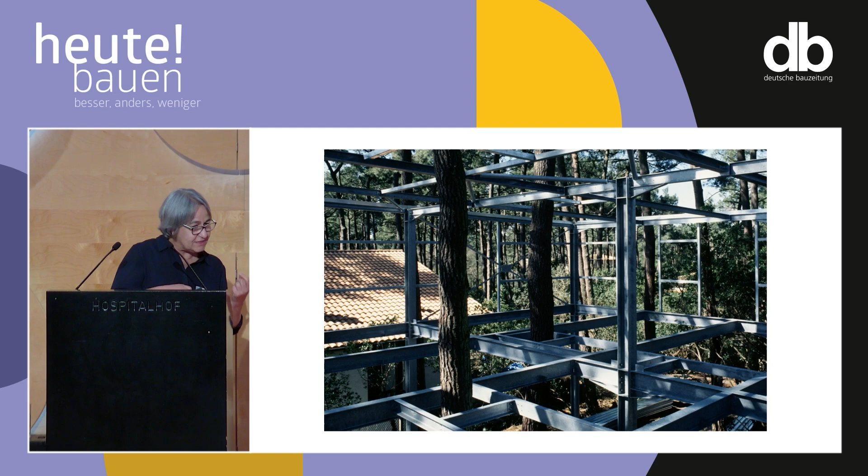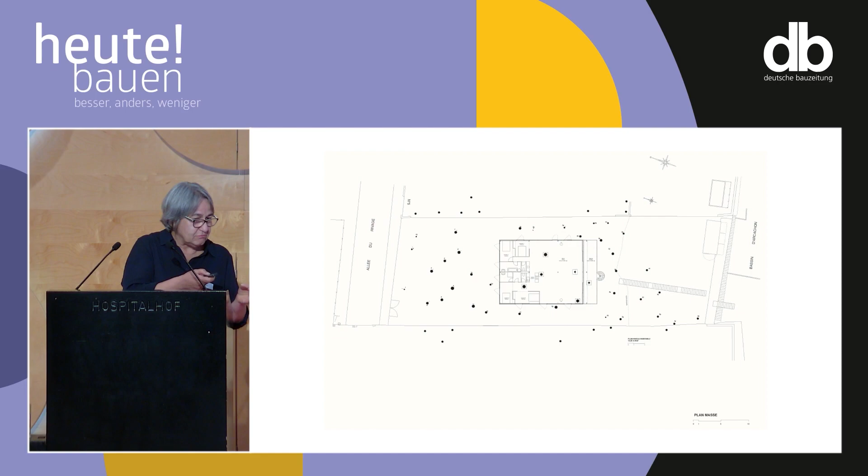So the house is elevated at 3 to 4 meters high, and it's a simple construction that is not made in function of the trees, but tries to integrate into the trees. And what is also interesting is that the land is so expensive in this place that the cost of the house is something like 20% of the cost of the land. So it really gives finally the good place to the architecture. Architecture is not so important at this place.

So the trees are inside, in the middle of the corridor where they were. And the inside, it's a mix of landscape and architecture, but where the landscape still dominates. Making with value of the place, that was also the question in this little square in the city of Bordeaux. It's a project that we did in '96.

We were involved by the city, as a few other architects, to work on a number of squares in the city. The city had a project which was called embellishment of the squares of the city. And they did the first place as an example, with new pavement, new design of benches, new furniture, new lamps. And they gave this as an example that all the squares could be embellished in that way. So the square was not really in the city center. It was a very quiet neighborhood behind the train station.

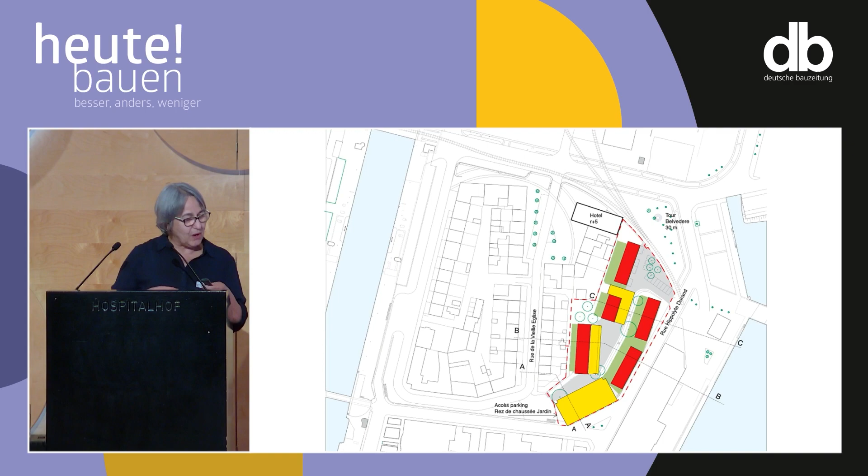And we understand why people were so happy to live there, and we didn't see which reason could allow us to say, no, you should go, because we have to replace all of this. And we propose this kind of project where, in red, it's the existing. The lowest red buildings we transform into houses to improve the typology, to make larger apartments. The yellow in front of the red is an extension of the existing to transform the housing, but also to go higher, to add new housing. And the yellow is a new building in place of the parking lot.

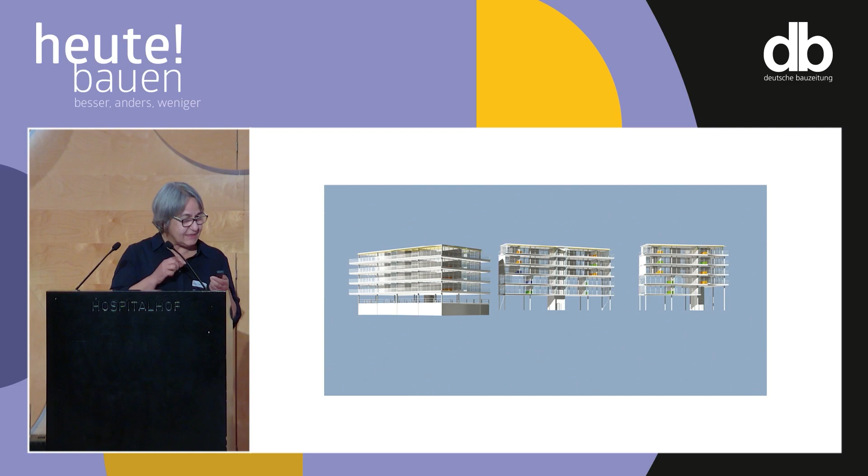So the addition was to create these new buildings, but they were not alone, they were integrated in or added to new constructions. And that was the opportunity also, and we proposed already at the time to do this extension without removing any family. So the extension could be made, and then it's a new space in front, but keeping the qualities of what is already there. Extension. So that was the proposal.

They were really interested by the proposal, but because the brief said that the demolition should be made, they couldn't accept this project, so they decided to cancel the competition and to make a second one. We couldn't participate in the second, and now this Little Morocco does not exist anymore. But that was an interesting experience, and that was also finally the opportunity to start a discussion with the owner. And 5 or 6 years later, we were involved in a project of transformation of a small tower, but it cannot be so satisfying because what is lost, you cannot find again.

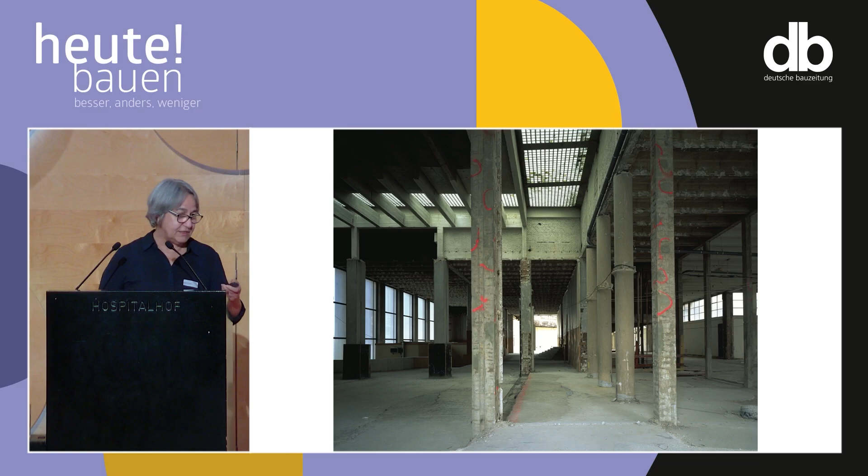So suddenly, the government decided to stop this project of transformation. And this was a museum, and this became, after 1 year of construction works, this kind of ruin left a few years with nothing inside, really in the center of Paris, facing the Eiffel Tower, with water falling inside, with no more elevators, a lot of things broken, a great fragility of the structures because the walls had been broken.

And probably somebody said, oh, it's a pity to let this place close with nothing. And they decided to put there a very little project, which was a temporary project of Center for Young Creation, with a budget of 3 million. 3 million, and the building is 26,000 square meters. So they launched a competition. So we applied, we were selected for this first phase, and in fact it was a special competition because they didn't ask to make a project.

We made a visit, and they said to the 3 teams, you should come back in 1 week and say what you propose to do for this temporary installation. And the fact that it was so little money and a temporary installation meant that finally the Ministry of Culture didn't take so much interest in it. So after 1 week, we came again, and we just gave a text, and we said, in fact, here the architecture is already there and is already fantastic, but the building has some damages.

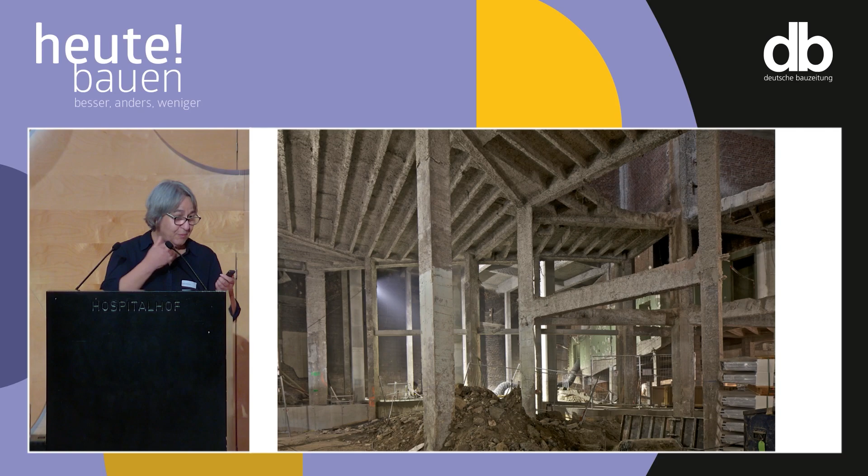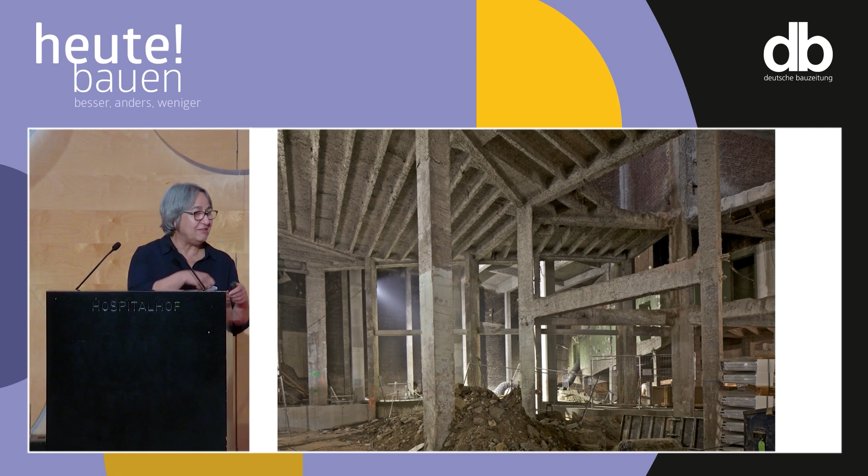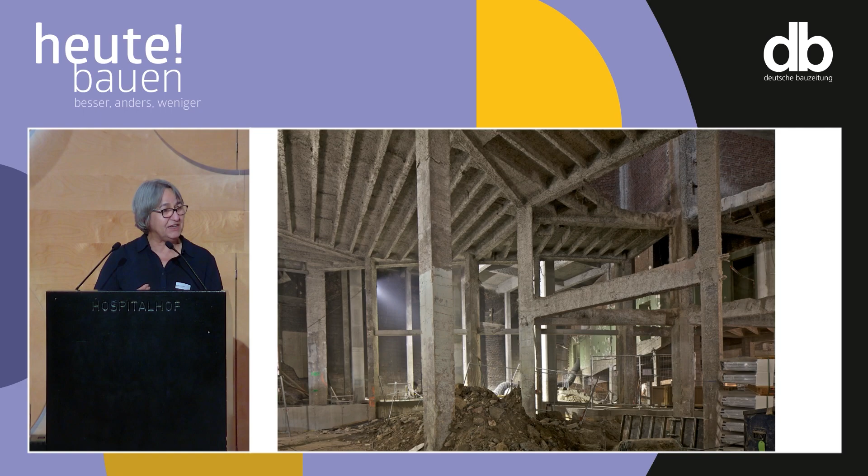So the first thing is, they were here only for the inside, the future directors of this contemporary art center, and they proposed to us to come, because you can imagine that there were absolutely no plans of the existing situation. So everything had to be made on site. Take notes on papers, photos, and notes. So that was at the same time fascinating, at the same time funny, and at the same time very, very stressful. But in fact, nobody took care of us for 1.5 years. So sometimes somebody came: where is the project? Can you show something? Okay, we come back later.

And one day, we were finished, and they were forced to open the door. It's not so easy because, of course, there was the fireman, the commission, and so on, but finally we did it. And in fact, the goal was to say, what is the minimum that we can do that allows us to place the building again in a positive situation, that it restarts to be a good building with no more holes in the ground, no more weak columns, and then it's probably enough to reopen for artist exhibitions. And we did it, and it was a big success.

It was supposed to be for 5 years, because the state still had in mind that they would like to make a huge refurbishment, but 5 years later they didn't have the money, and they decided to continue the temporary for another period of time with another budget, and we continued repairing the broken roofs and so on. And with a second budget of 13 million, finally we managed to reopen the 26,000 square meters.

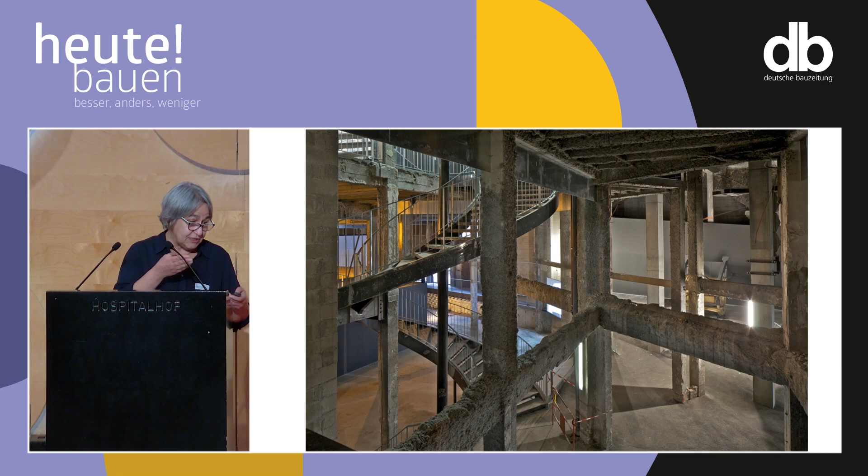But in fact, this issue of temporary is something very interesting, because it does not engage the same things. Because with the temporary, sometimes you can explain that you can avoid some norms because it's not forever. But fire security, people security, there is no discussion, but it's not the most difficult. In fact, probably it's an issue to think, not to think of buildings in terms of 50 years, but how we can deal with this idea of permanence and temporality, and probably it's something very interesting now to think differently about the design of the building. So just some pictures; we finished the second phase in 2010, and it's still there, and now nobody thinks to close it.

And in fact, finally they decided to place inside the Contemporary Art Center. So it was requested in the competition to fill this space with floors for storage with very controlled conditions of temperature, humidity, and also to organize some exhibition space. Which immediately would have totally transformed the existing, because it would have been necessary to insulate, to change probably all the glass and so on.

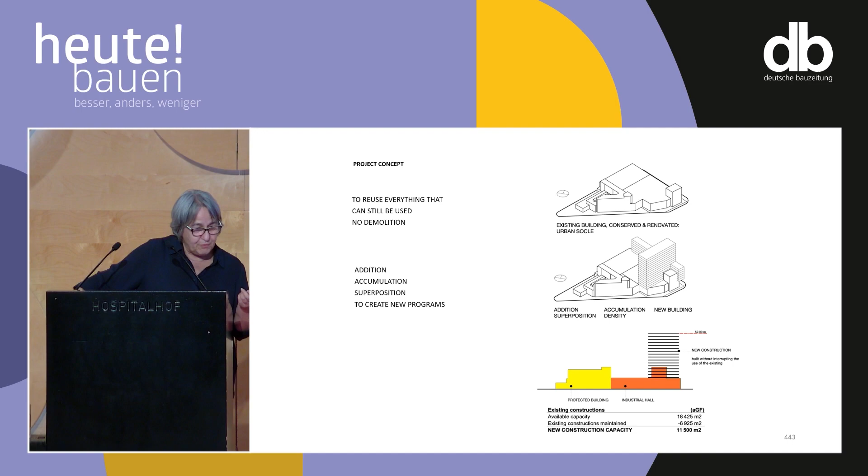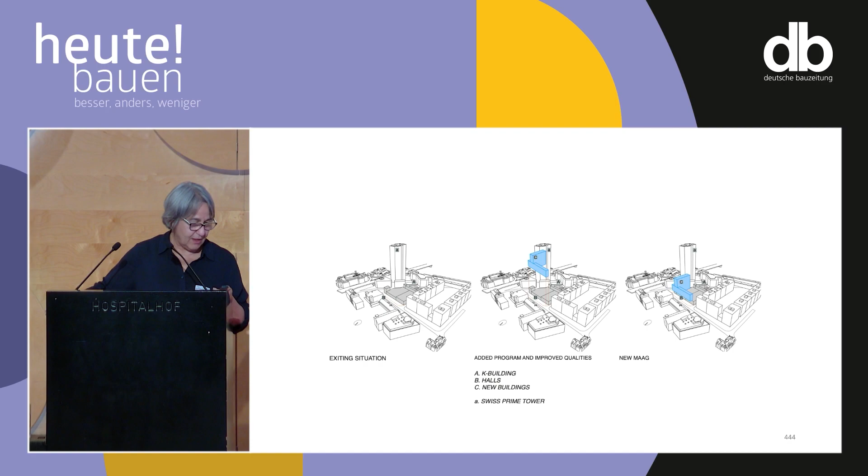To create the new programs, I mean the housing. So that was this superimposition, that kind of graft of a new construction, the blue one, to create this new ensemble with flats, and take the opportunity to reuse also the roof of the factory, which was very heavy because inside there were big cranes, to make a garden with greenhouses, to renovate the others, but also that could be done without emptying the place, so that the concerts could continue on the place.

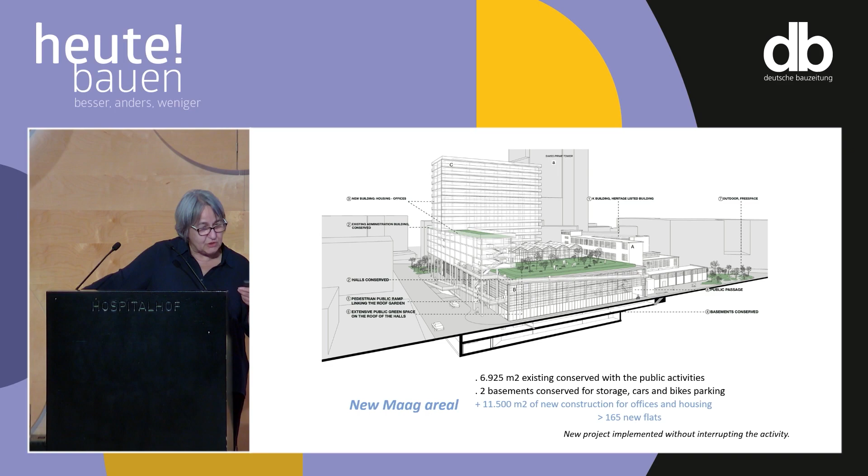And at the end, with this project, we could propose 11,500 square meters of new construction for offices and 165 new flats, which was the expectation of the brief. So this is the rendering. It's still a rendering because we didn't win the competition. And one thing which is very strange is that, because the master plan of the city was made in the perspective of demolishing the building, there were new rules for the implementation of the new buildings.

But this new line was behind the current wall of the existing. And they considered that the project was out of rule because we were not respecting the line of a future plot that would never exist. But that was a very interesting project. And of course, it's never lost. When we lose a competition, you always win something, which is for the next time.

And the last part of the presentation is a very important topic on which we have worked for more than 20 years. It's about the transformation of the housing blocks to upgrade quality and extend living space. In fact, all these housing blocks, very often social housing built in the suburbs of cities in the 60s, 70s, at the time were representing a kind of utopia of a new way of life. But finally, after some years, because it didn't go to the end, the transport was not enough, not enough equipment.

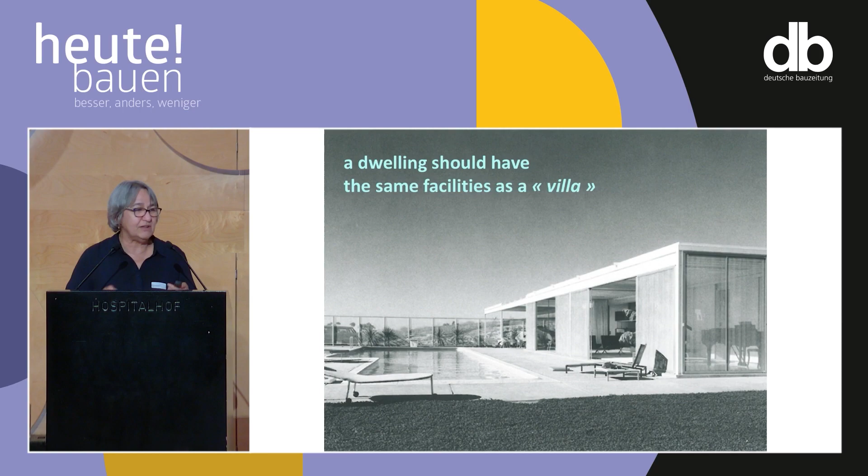So for us, it's this image that we have in mind, also for doing new housing, that every dwelling should have the same facilities as a villa, and it should not be an issue of cost. It's just a way of how to do a project and how to do construction.

So all places have a value that can be revealed and developed, and the transformation of the existing housing is very clearly the opportunity to upgrade massively the quality of all housing with less money and in a more sustainable way, because it's very difficult to understand why, when we build new today, it must meet the highest requirements, while for such a big stock of existing housing, it's not the same involvement which is proposed to renovate it. And it creates a big gap, and the stock is enormous.

So it's very important to think about this issue of transformation at the same level of quality as the new. So transformation makes it possible to be more generous, to give more space to each inhabitant, to produce good and affordable living conditions, no longer determined by the economic, regulatory, or normative minimum, but by the maximum generosity and sustainability.

So when we studied this transformation versus demolition, we arrived at this comparison of numbers. In France, the cost per dwelling, demolished and rebuilt, is between 165,000 and 200,000, while for the project of transformation without demolition, in different cases that we studied, different structures, different states, we arrived at an average of 55,000 per dwelling, which means that for one dwelling replaced by one, you can do 3 or 4 renovated apartments.

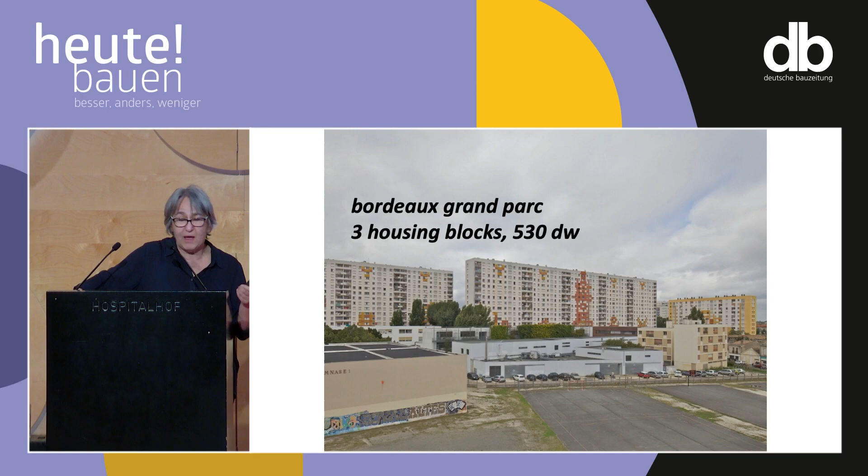So in Bordeaux, it's a neighborhood built in the 60s of 4,000 dwellings, which is very prominent because the city is very low, and this place has 15 levels or sometimes 20.

So that was a neighborhood, but today it's totally integrated in the city, and it's a good neighborhood with all the public transports, all the equipments, and even more, it has been integrated in the perimeter of the UNESCO protection as modern architecture. So it helped to convince the mayor not to demolish.

And we were involved in the competition, and we won the competition, and we said that we would propose a transformation of these blocks, but it's not about the shape. It's not about transforming a slab into 3 blocks or cutting one piece. It's just about what is the quality of living inside and what should we improve to transform for a long time this building. So we propose to do this transformation by the living space and transformation without removing the 530 families.

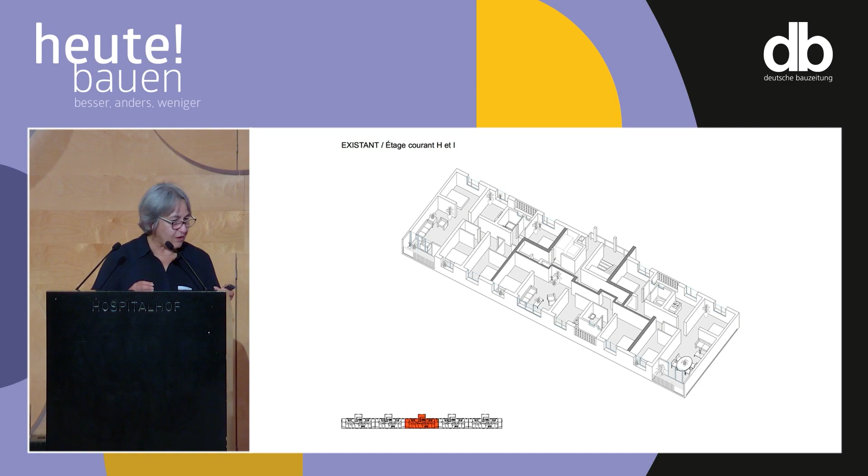And from this piece of one of the big blocks, the process is to add in front a new space, a kind of module of 4 meters, and to take this opportunity to transform the windows in glass doors, to replace this by a good facade, to make the better comfort inside, then to have a second layer, second facade outside.

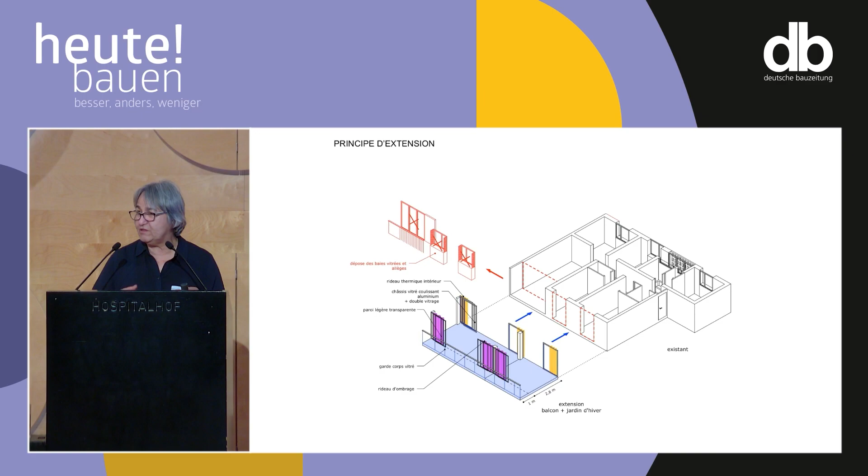And in fact, it is the strategy of a space making the comfort, the insulation, summer and winter. In winter, being closed, it takes the sun, and immediately you have a good temperature inside, and in summer everything is open and it makes shadows on the glass facade, so we avoid the overheat. And this space is also used for the everyday life.

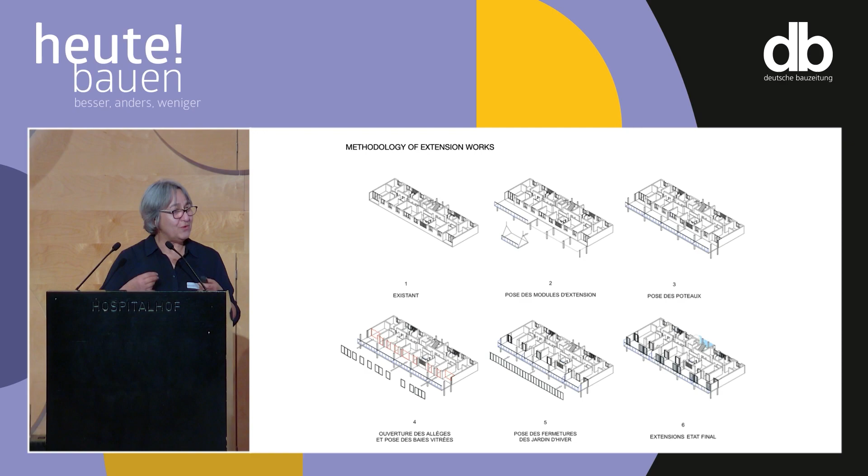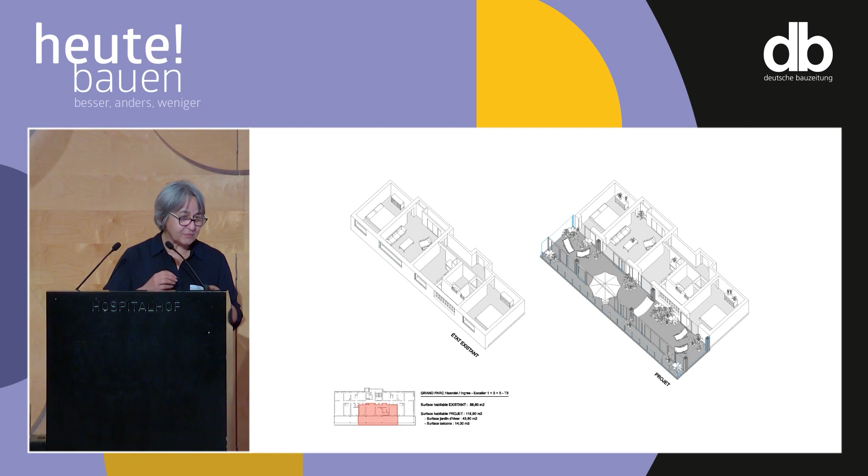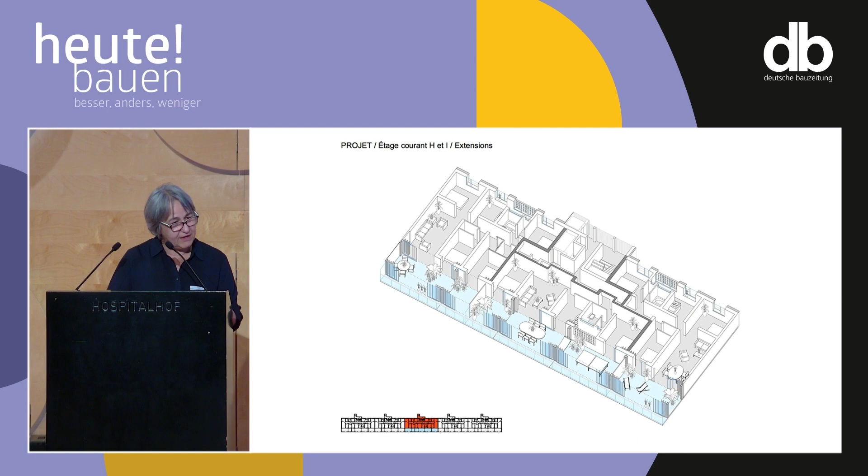So at the moment of the design, it's also very important to think of the methodology of works, because we knew that we were leaving all these people inside, and it should not be so disturbing. And this was the proposal for the apartment after transformation, with inside some renovation that was not so disturbing, and also replacing all the elevators, so a number of community spaces were renovated, and we propose to do this extension at every level for every apartment to give the same condition.

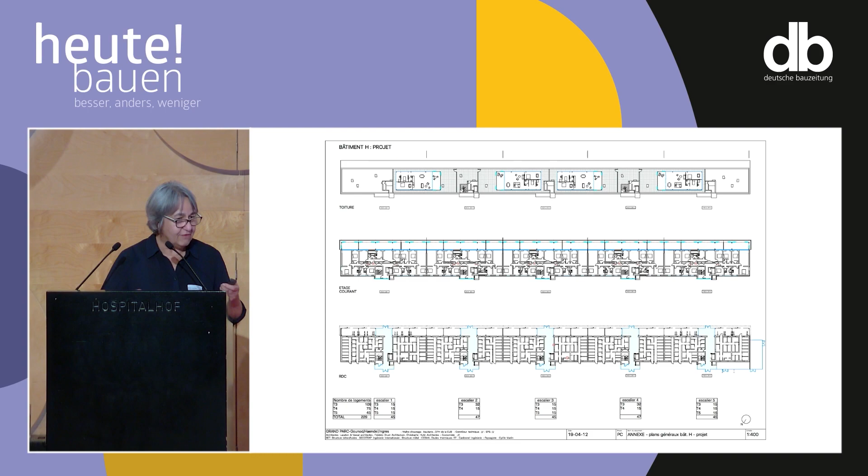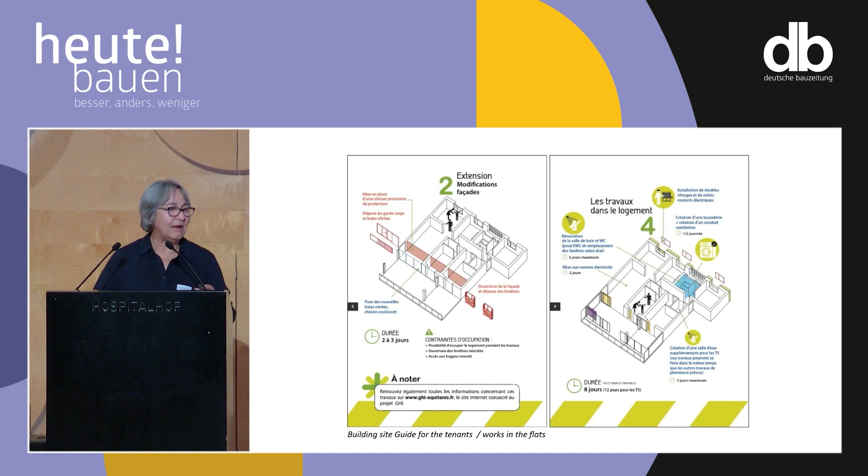We did a prototype so that people could visit, and the prototype became also the place for the exhibition and the communication of the project during all the process. It's important also to have this process of giving a lot of information to people, being very close, explaining, and there was this guide that was made for the inhabitants to explain the project, but also the process of construction, and a number of phones, names, emails, so they can ask for help anytime if needed.

So besides, there was also a discussion between the owner, a social housing company, and the tenants, and it was finally proposed that there will not be any increase of the rent after the transformation, because the owner considered that it was his job to maintain and to give better efficiency to the building.

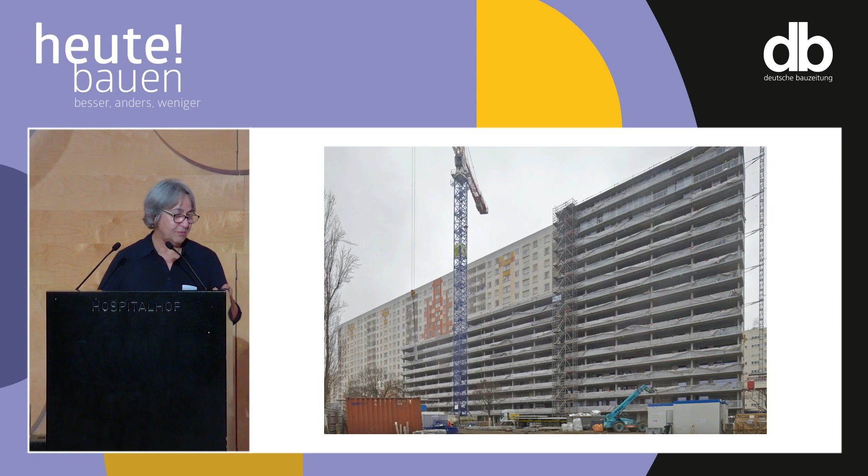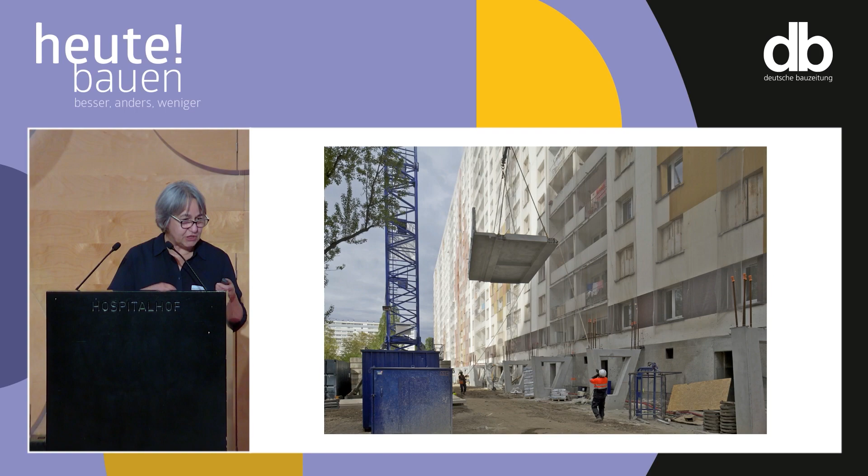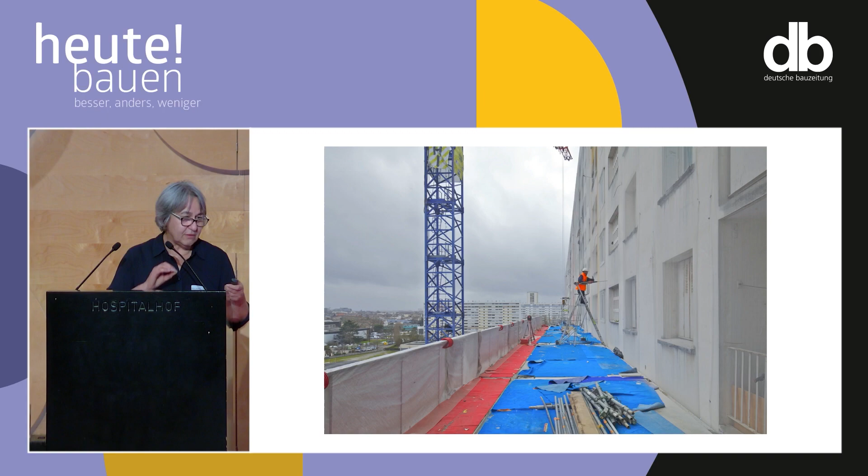So then the process of works started with these modules, which were built 2 kilometers away and brought on truck. You see the preliminary, the columns and the foundations, because it's not supported by the existing building. And then the process of placing the modules, something like 7 days, and then they prepare the next level, just making attachment to the existing for the wind, the series of columns, the floors, and so on.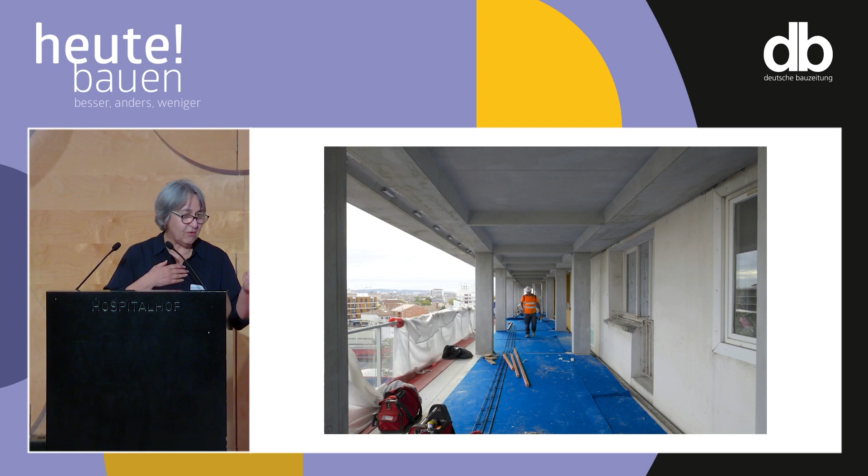And when we had a number of levels secure enough, we started the process of opening the facade. Until now, there is absolutely no disturbance inside. When the process of opening starts, it becomes more difficult, but the commitment was to make the replacement of the facade in 2 days maximum. So the first day was the opening.

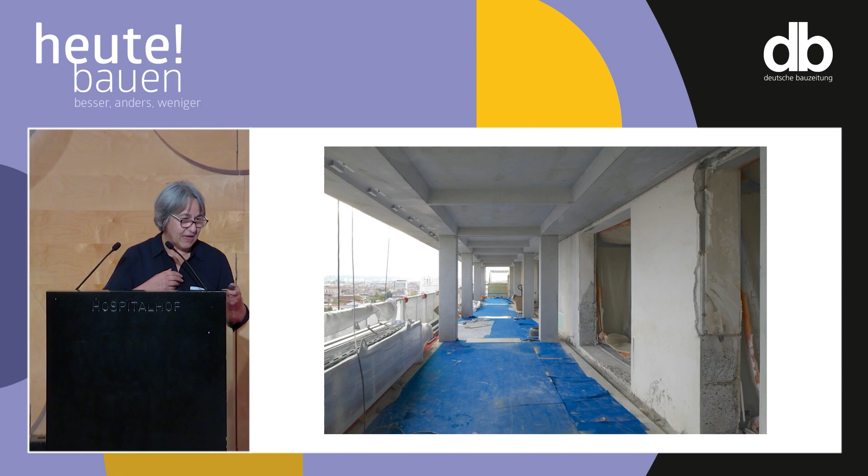With asbestos in the windows and some specific conditions. And the second day, the frame arrived with new glass facade, insulated glass. So when doing this winter garden, the new glass, we didn't insulate the existing facade because the space acts as an insulation. And some weeks later, the inhabitant can take the use of the space.

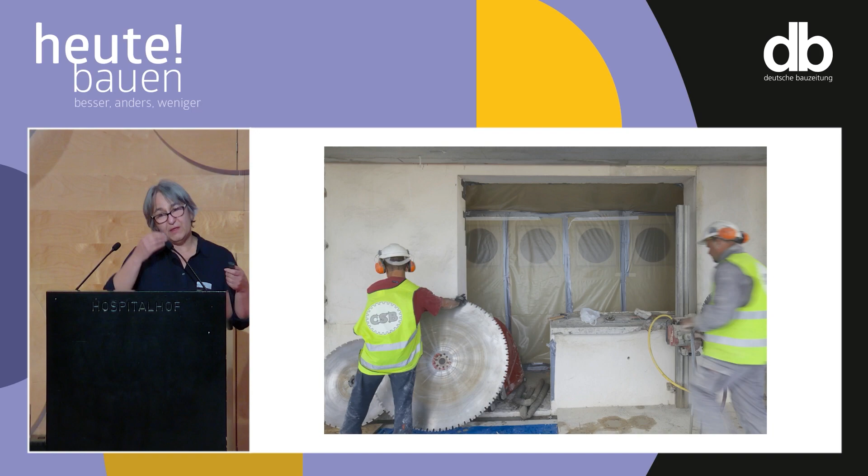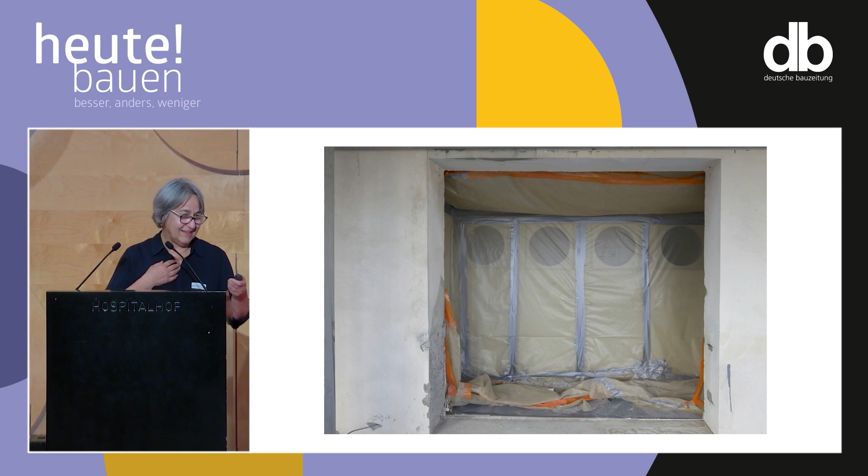So this process of just making a temporary partition for the dust. From inside, you can continue staying. And step by step, after 2 days, there is a new glass window, and there is just the finishes around the door to do, and the transformation.